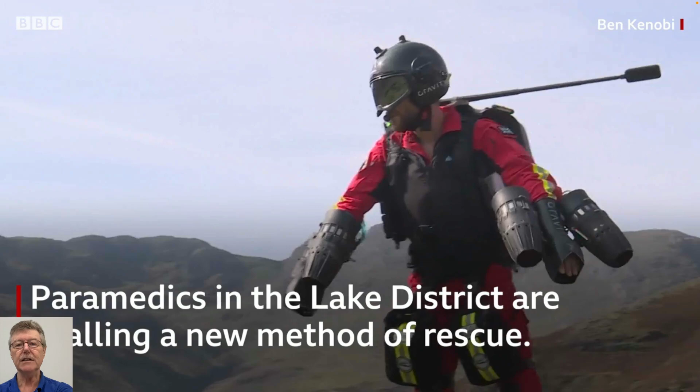I think there's another use which is more interesting and civilian, and just relies on the fact that... for mountain rescue, right? Exactly the same deal, same backpack, hovering, I don't know, 10 feet off the ground. Want to climb up a mountain to go and rescue a climber, with a drone in the background taking pictures. And you can just move up the slope very quickly. Same idea, just burning fuel, making sure your hands don't touch the things, using them individually.

...to nothing more than just the position of those to be able to steer and keep you off the ground. So just like the jet lev, we could do the calculating with that. The only thing that's different is that now the fluid coming out of them is no longer water at 1,000 kilograms a cubic meter - it's air, at about a thousandth of that, 1 kilogram. So you could do the scaling and realize you'd have to have a much larger velocity to get the required force on the ground to be able to lift a body of the same kind of weight as the jet lev. So kind of interesting applications for these.

All right, so that's kind of where we are. So that's the eye candy for today.

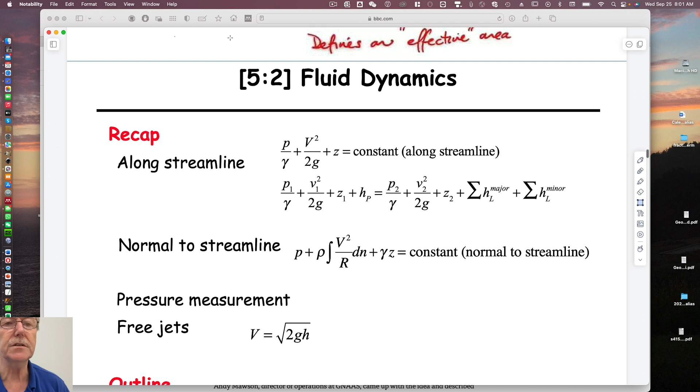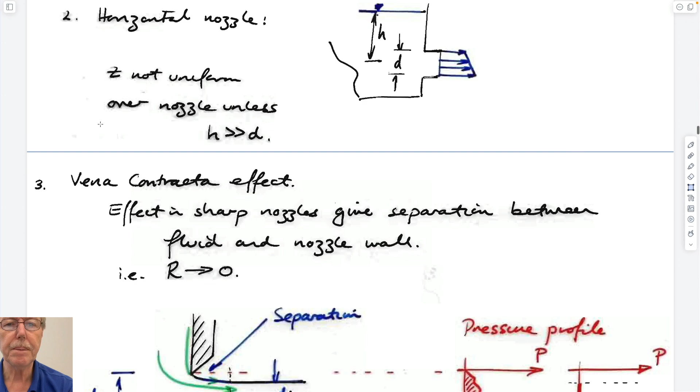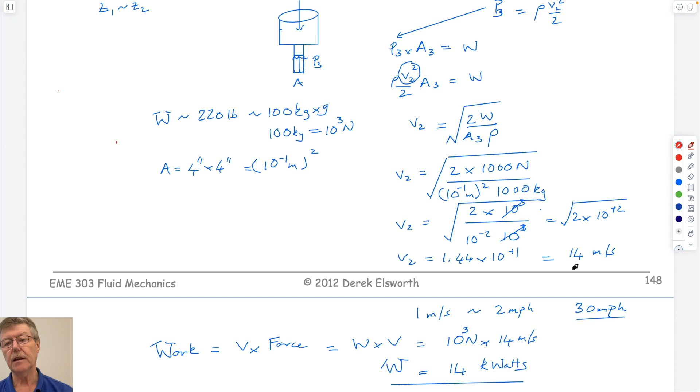Today I just want to continue with what we were talking about previously. I guess I should correct something from last time. We were talking about the jet lev, and we talked about the flow rate needed to lift this thing, which was something like a velocity of 14 meters a second. Then we multiplied this by the force, the weight it's holding up, which you could also calculate from pressure times area, multiplied by the velocity.

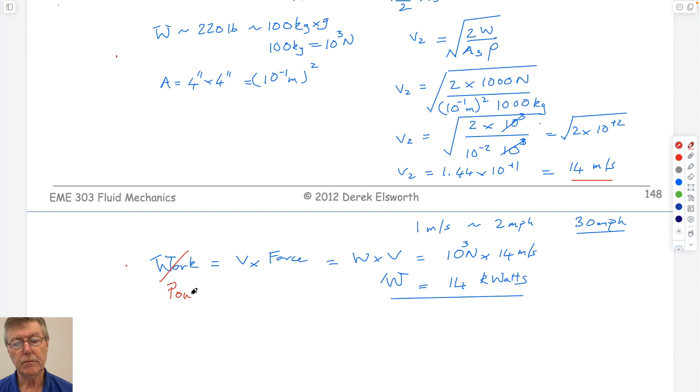So this isn't work, this is actually power, right? Don't need to be pedantic about it, but work is equal to energy, which is equal to force times displacement. So it's in units of Newton meters, which is a joule. And power is the rate of doing work, which is Newton meters per second, which is joules per second, which are watts.

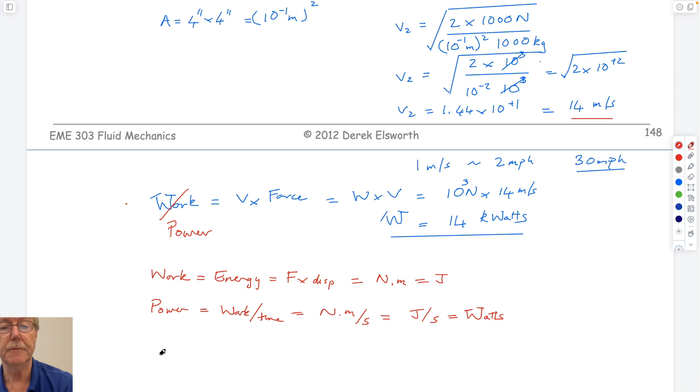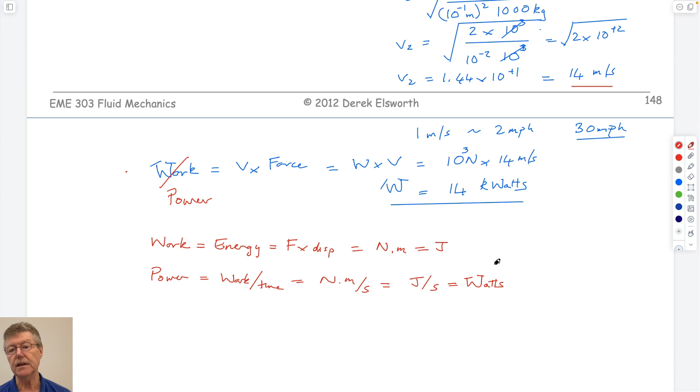Hence the use of W here. And so instead of a displacement, we're using a displacement rate of velocity, and that gives us the power you'd need to be able to run it. The other thing we didn't do last time was another example, which perhaps we'll do now.

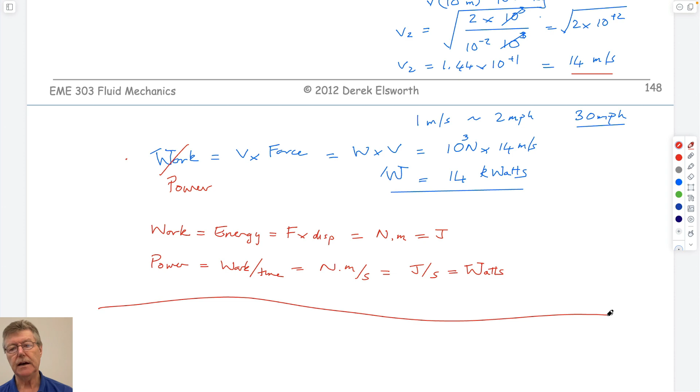Before we get started, let's go over what we might try to do today. I just want to do some examples, then that's all I want to do.

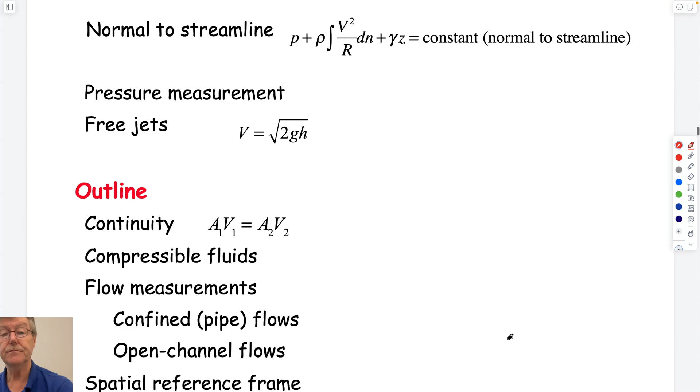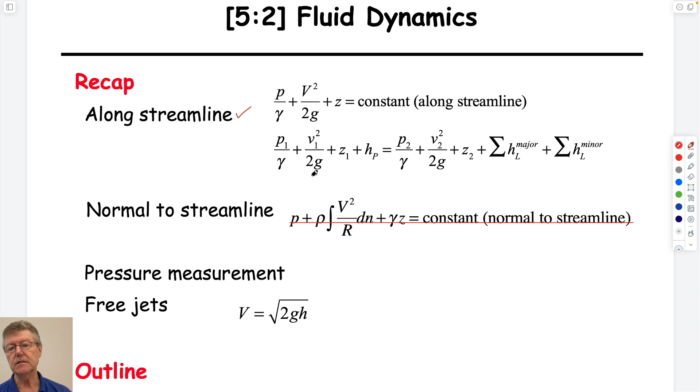We talked last time about flows normal to streamlines. Rarely do we have to use those. Much more commonly, we use flows along a streamline. This represents along streamline velocity, upstream and downstream. We can write it downstream and upstream, it doesn't matter. For now, these loss terms are zero. We don't care about them.

And we can write it, I always write it this way. This is just writing it between two places. It stems from the fact that from upstream to downstream on a streamline, the Bernoulli potential is always the same, comprising a pressure head, a velocity head, and an elevation head. This is also the energy put into the system by a pump, but don't care about that now.

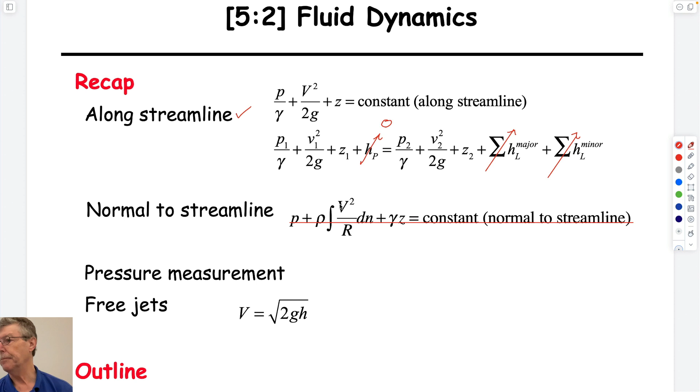So we've used Bernoulli a couple of times. I made the point of what it requires: inviscid - I don't think I got them all last time - irrotational, incompressible. I think I said isothermal, that is the case but that's not the main one. The other one was steady state.

So inviscid means that essentially viscosity is zero. There are no viscous losses. So air comes past me, or water flows in a pipe, there's no drag on the pipe slowing the water down. So inviscid is a requirement.

Irrotational means you don't get eddies forming as you flow past a structure. So maybe if you flow past a structure, air comes here and goes around it - you don't get things doing this as it goes past. Incompressible means it should be a fluid, a liquid, but we'll apply it to compressible fluids like gases as well. And steady state means it always looks the same.

Yes? What causes the eddies to form? Not Coriolis - a small perturbation allows it to get out of whack. Maybe there's some roughness that makes it go out from the skin, and that develops that. But I guess they're for larger scale as well - just a flow field, interacting flow fields.

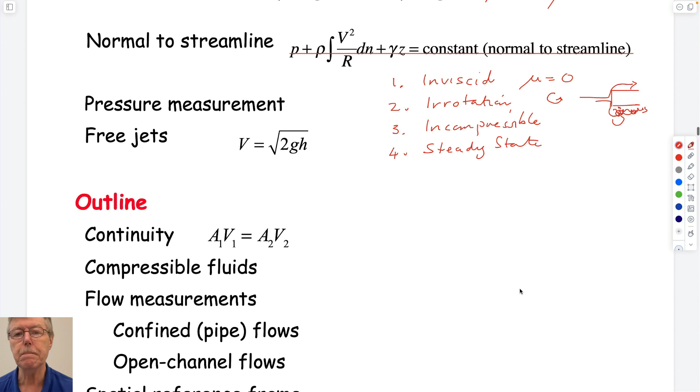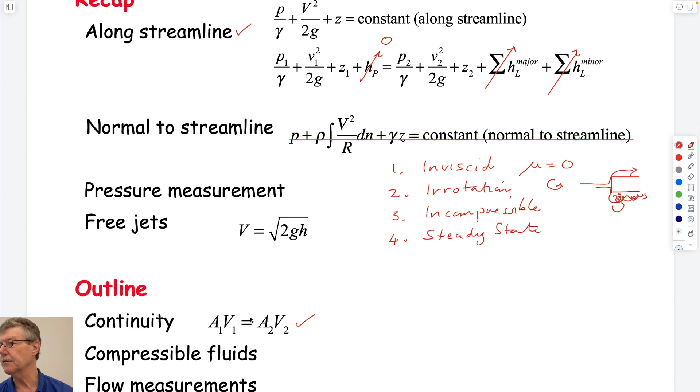Okay, so we'll maybe have a look at some of these. We talked about continuity - volume in equals volume out, or mass rate in equals mass rate out - which, if we have Bernoulli's equation with 6 terms and 2 unknowns, we can link the velocities and then only have 1 unknown and 1 equation, then we can solve that. So we can do some examples, let's just try messing around with some ideas.

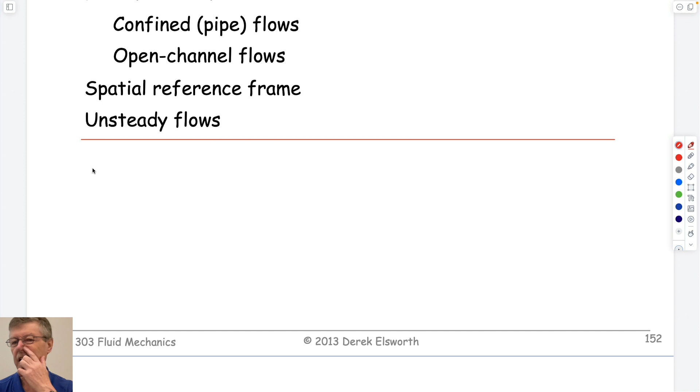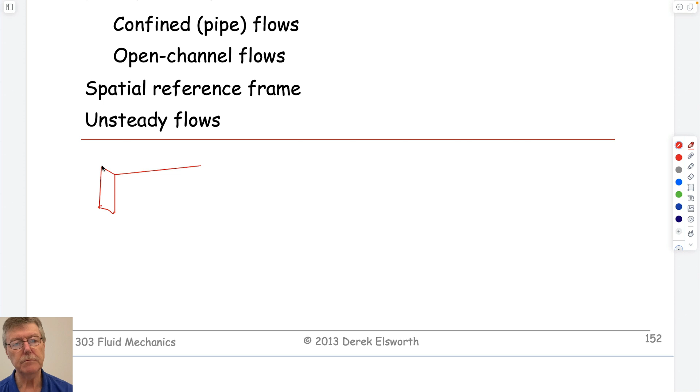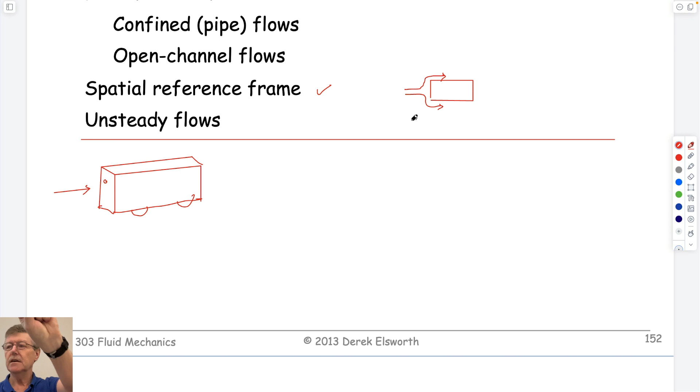Wheel here, a wheel here, and his little face here. And so relative to that, we have a velocity, and it has to be steady state. We kind of alluded to it for the pitot tube, right? We know that if you're looking at a bicycle go past you, initially it's here, then it's here, then it's here, if you're taking a picture. So the air in front of you at this particular spot initially has 0 velocity. The bike comes along, it has to get around the bike by doing this, just as we previously drew. So the air has to be moving some, and then the bike is over here and the air is static again. So clearly, if we took those 3 shots, the point of air that we have here is not steady state because it's changing its velocity with time. It's 0, then it's 10 miles an hour, then it's 0. And so what we have to do is choose a frame of reference that we attach ourselves to the bike.

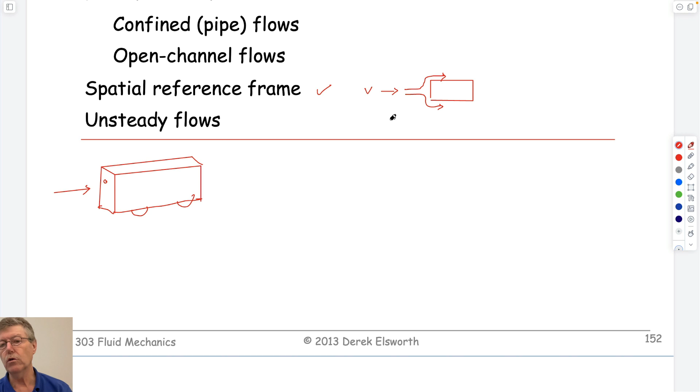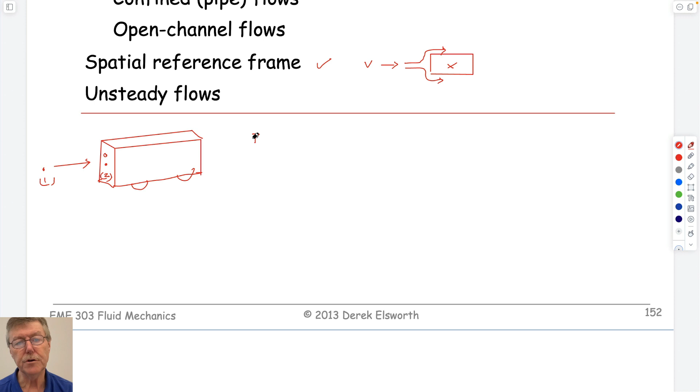So we're traveling with the bike, and instead of the bike moving, we're looking at a static bike, and the velocity of the air in front of us is moving towards us, and we're static, like a bike in a wind tunnel. If we want to do this, we could do the same as we did before. We can write the pressures at locations 1 and 2. We can write Bernoulli at 1 and 2, and then choose what we know for each of those.

Plus V2 squared over 2G. We know that upstream air pressure, atmospheric, elevation Z1 and Z2, they're not 0, but let's make them the same, so we get rid of them if they're physically the right elevation. This is Z, and this is Z.

Velocity here at point 1 is 0. We don't know what the... No, not velocity, that's wrong. I just disregarded my own tenet, right? It's coming towards us, it's not equal to 0. That's the whole point of this exercise, I guess, right? So velocity is unknown, the pressure is unknown, but the velocity here of this jet impinging, V1, V2 has to be 0 because it's turning a right angle, so it hits this, this has to be 0.

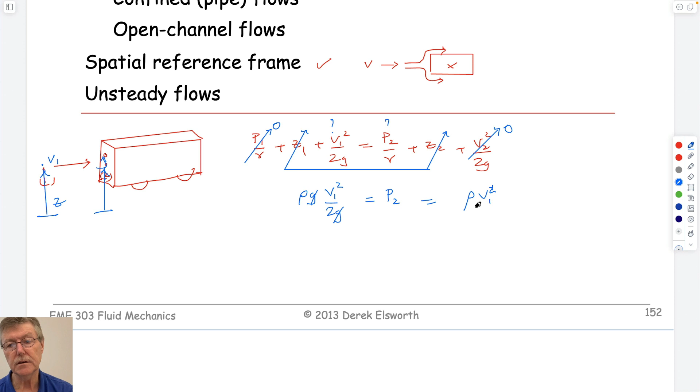So if we rearrange that, in terms of pressure, we end up with pressure 2 equals V1 squared over 2g times rho g, which is equal to rho V1 squared over 2. And so if we know what the terms are for that, and if we know what this area is, let's say 1 meter squared, let's try that.

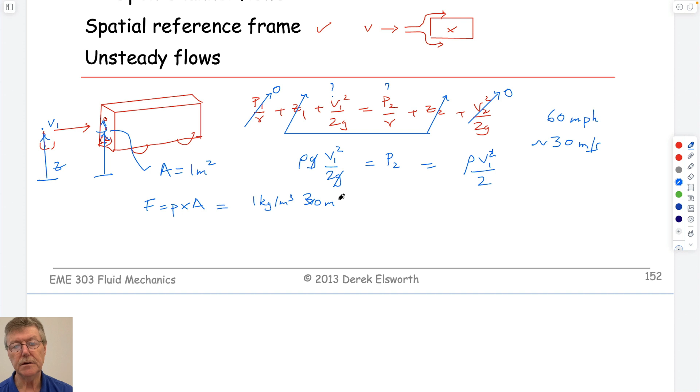Then what do we have? Force is going to equal pressure times area. Pressure is equal to density of air times V1 squared. What's V1? It was 60 miles an hour, which I happen to know is 30 meters a second. So this is 30 meters a second squared.

Divided by 2, which is P, times 1 meter squared. So how good am I? 3 times 3 is 9, which is essentially 10 plus 2 zeros, which is 1,000, is that right? 1 times 3, 3 times 3 is 9, 10, 2 zeros, 1,000.

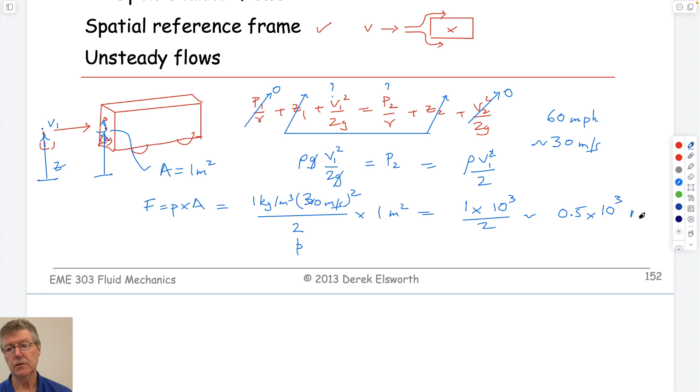Am I missing something? Density, velocity squared, density, velocity squared over 2 times 1. So 1 times 10 to the 3, this is half times newtons. And so that's the force that's applied.

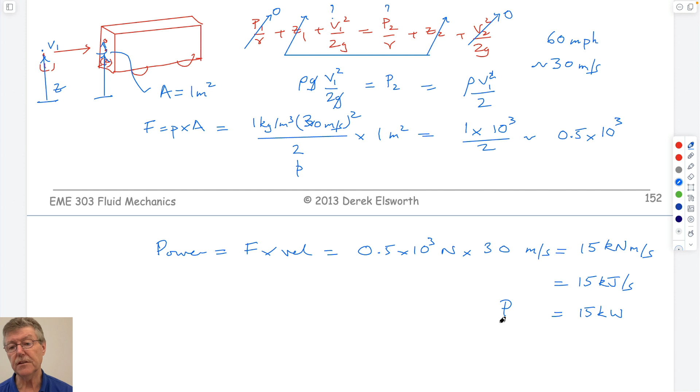And so if we want to know the work, power, I guess, right? That's right. Equals force times velocity, equals 0.5 times 10 to the 3 newtons times 30 meters a second, is equal to 15, that's right, kilonewton meters per second equals 15 kilojoules per second, which is 15 kilowatts. So the power you need to cycle at that speed is apparently 15 kilowatts.

Well, one of the things that I had on here, the output of a person, anyone know what the output of a person at max, was it VO2, is? Hazard a guess? About half a kilowatt. So I know this probably, if we look at the thing that we had, this is it.

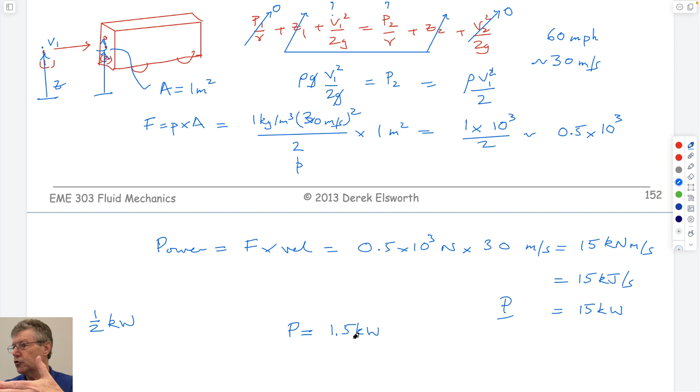I can't imagine the front of this, which is here, is a meter in cross section. So maybe it's a tenth of that, right? If it's this, since it's tapered, that would take it down to the power being 1.5 kilowatts. That's probably closer to reality. If we think max for a person is half a kilowatt, then this is pretty close. It's probably because it's tapered, it's actually not a straight, flat face, and so it's probably in the ballpark. So it probably can't be 1.5 kilowatts unless he's a super athlete, but it's something of that order, and that's how you can get that number. Okay?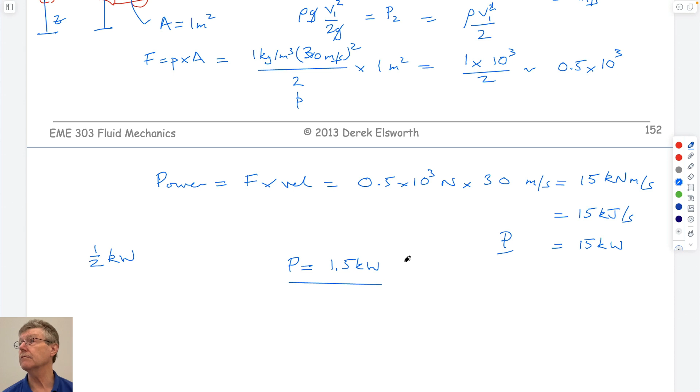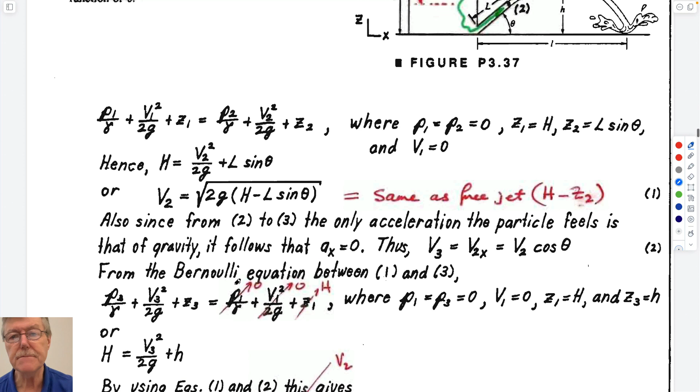So, spatial reference frame matters. It has to be steady state. What other examples do we have? Yeah, okay. Well, let's do Jesse Sharp as well, because that's instructive. So you have Niagara Falls.

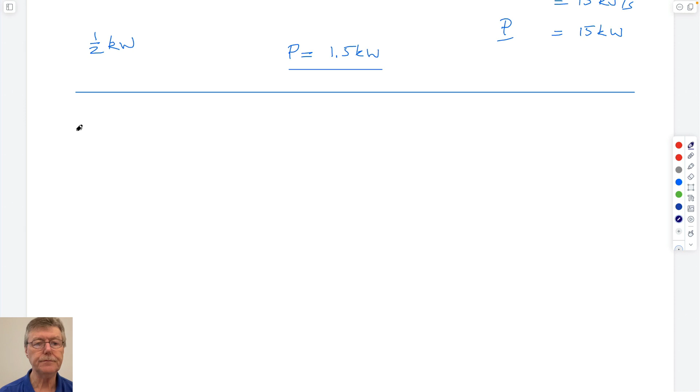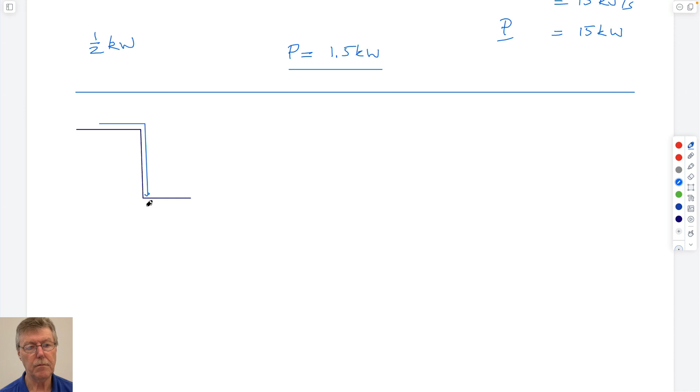And you have Jesse Sharp wanted to come across Niagara Falls. So you have points 1, 2, 3, and 4 if you wanted to, right? Niagara Falls is about 120 feet, I think.

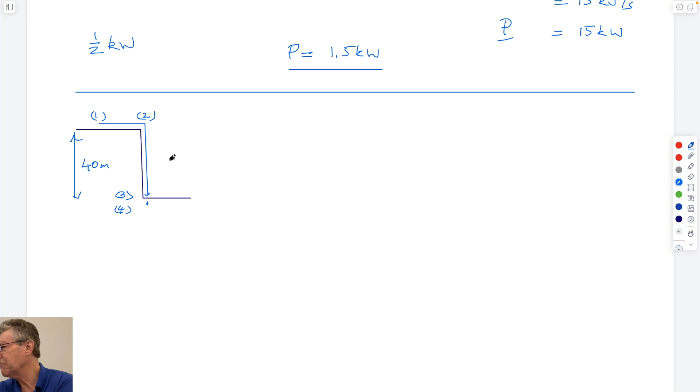So what do we want to do? We want to calculate what the two things I guess we want to calculate. We heard that it took 3 seconds to get down, so we could try and verify that. And we don't know what the impact velocity was at the depth, but we could calculate the velocity.

The velocities we calculate using Bernoulli are always streamline velocities. It doesn't care that we're going around a right angle. It's always a streamline speed, if you like, and so it's always in the direction of the streamline. And so if you wanted to calculate velocity, then we would calculate

elevation 1 plus P1 over unit weight plus V1 squared over 2G equals Z3 plus P3 over unit weight plus V3 squared over 2G. This isn't 2G, is it?

Unit weight. And so what do we know? So if we take our datum here as z equals 0, then Z1 we know. Atmospheric pressure as gauge pressure - atmospheric pressure before it hits the bottom is gauge pressure. Z3 is 0, just from our datum.

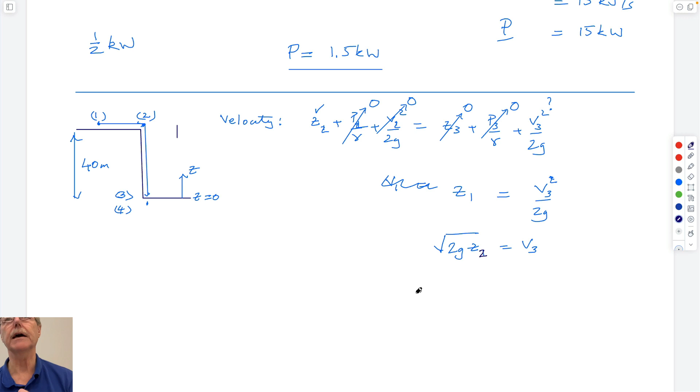It's exactly the same as if we had a container. If I can draw a container, with a free jet coming out of it.

This is H, this is V7, just so we know. Now VZ, V7 - the equation for a free jet was that the velocity is equal to the square root of 2gh. And so all this is exactly the same as this. It starts off at 0 velocity here. This is the same height. It doesn't care that it's doing this.

You could also, if you had a ramp - I think I'm going to confuse this diagram - if you had a ramp that instead looked like this, so that the water is flowing down this ramp at some velocity here, so you had V5. What's V5? This, I guess, is V7.

V5 is going to be what? It's going to be exactly the same as this expression here. So V5, if we looked at it, would be equal to the square root of 2g z2.

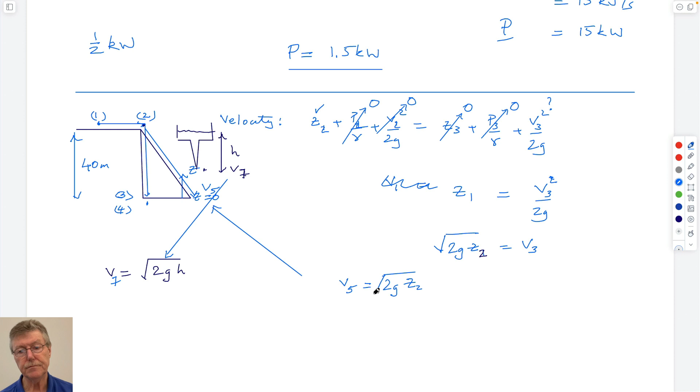But importantly, the velocity V5 is oriented in this direction, it's in the streamline. So the one thing you do have to remember for this is always that the velocities that you're talking about are along a streamline.

For a free jet, it's vertically downwards. Falling off Niagara Falls, it's vertically downwards. If it happens to be a ramp, a stream flowing down a steep incline, it's along the direction of that incline, and of course it would have components in the vertical direction and the horizontal direction. Each of those would be different - they'd be the maximum value here along the streamline that you have to worry about. And so that's useful to know.

And so we get exactly the same expression as we do for a free jet, and we do even if it's inclined. It only cares about the height of this drop.

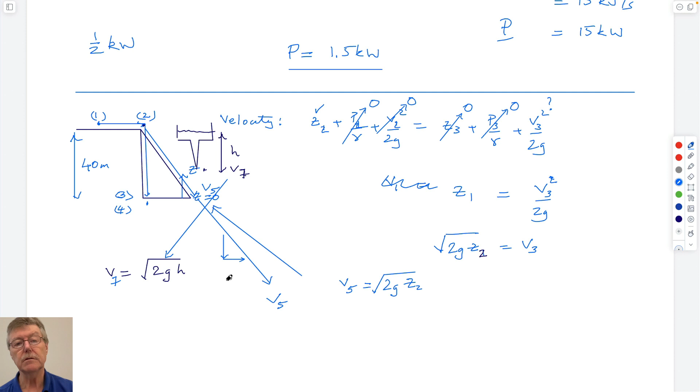And I guess the other thing that you could do if you wanted to prove to yourself is if you want to look at what this acceleration is - if you write the acceleration in the z direction, we know that acceleration is rate of change of velocity with time. And we know that's the same as rate of change of velocity with time multiplied by 1, right?

And if we looked at the change in z with time, this by definition is a velocity. And we look at this, then we could take the derivative of dz of vz times vz. That's just what this expression is. And of course, we have

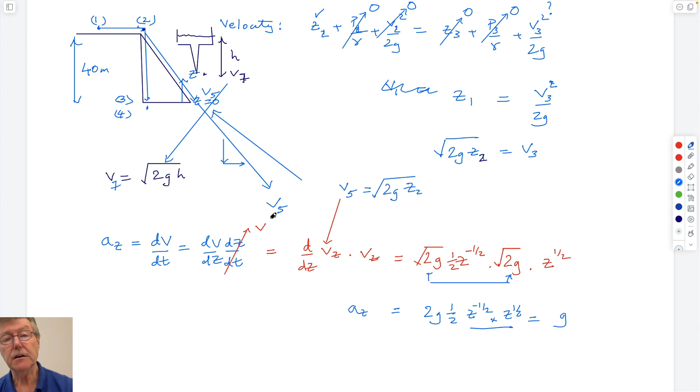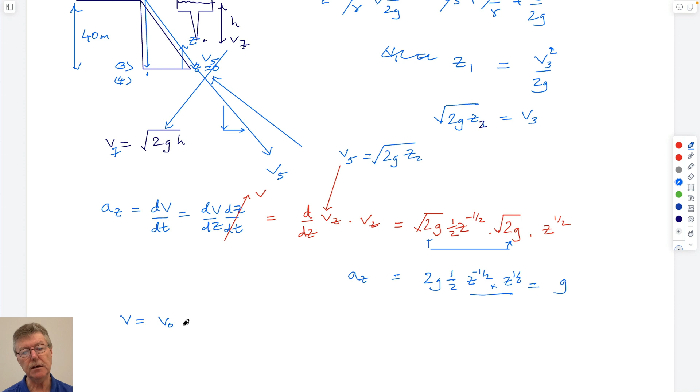Well, I guess actually the other thing that we might be interested to do is how long does it take to come down? Well, we know how to do that. So you've done that in your past before. Velocity is equal to initial velocity plus acceleration times time, right, from dynamics.

So velocity is just equal to change in elevation or change in location with time. And so you could rewrite that as dz is equal to v0 dt plus at dt. And you've seen this before, right, obviously?

Right. So if you want to know how long it takes to come down, you could just solve this equation. You know that as it's coming over the lip and going down 40 meters, the velocity here is 0. You know that you have to get down 40 meters. So you know this is 40 meters.

And you can, well, because it starts here, the constant drops out, and so it's just 40 is equal to times 2 divided by acceleration, which is gravity, equals t squared.

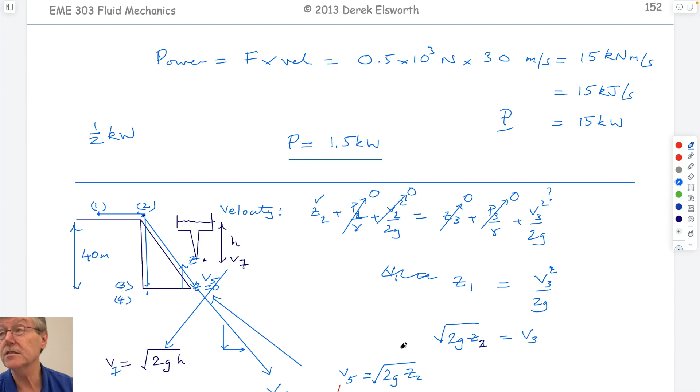So, other questions. So here's another esoteric example. So you have a bucket that has a jet coming out of the bottom of it. You have that jet directed at some angle. How high does it go up, and how far does it go if you're doing that?

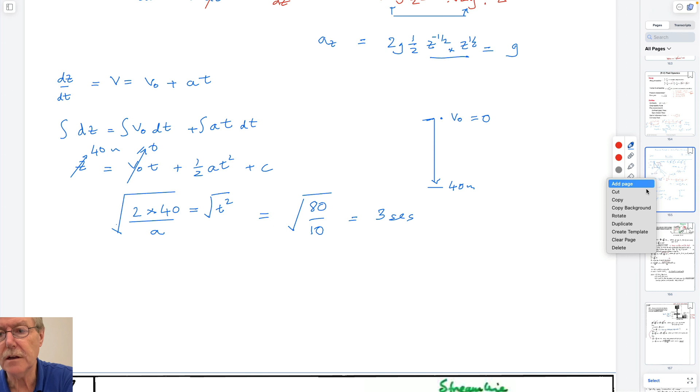How do you get that from Bernoulli? We could go through the example. I don't want to. I don't know if you like me writing these things out, but I think it's better to do that. Okay.

Let's do the example. All right. So here's the idea. Let's go through it slowly. We have a bucket that has a jet coming out of the bottom of it. That bucket has a water level in it. And that height is, we'll call uppercase H.

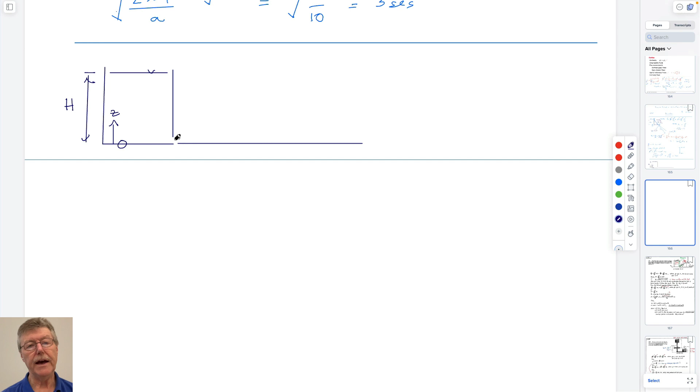We have the horizontal. We're going to take this as our Z. Z equals 0 is here. We angle this jet up from the bottom at some angle theta. And we want to know two things potentially. What's this height? And what's this length?

I'll do uppercase L. So the easiest way we could do this would be to direct the jet vertically upwards, right? So if we had the tube so that instead of being horizontal, it was going vertically upwards, then how high would the jet get?

So we can write point number 1, point number 2, point number 3. So if we want to calculate if it's directed vertically upwards, we could write Bernoulli between those 2 points.

P1, Z1 plus P1 over gamma plus V1 squared over 2G equals Z3 plus P3 over unit weight plus V3 squared over 2G.

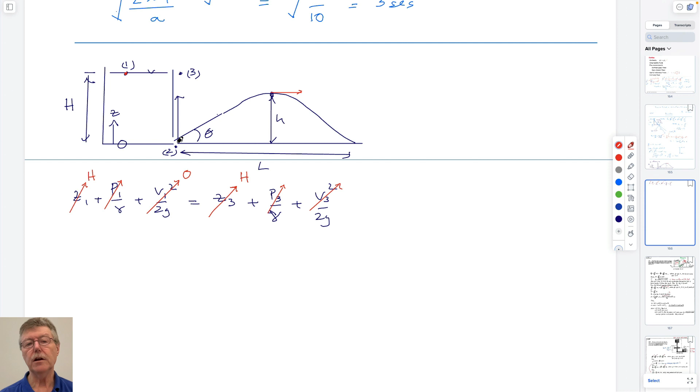So if you have it going up here, it starts off at some big velocity. It's acting against gravity as it goes up, slowly slowing at this apex where it's 0. Once it's here, a drop of water will fall back down, and when it falls back down, it'll be going exactly the same velocity in the opposite direction as it was when it was up here. As you can imagine, it's symmetrical. So that's one way to get that. And of course, if you just had a pipe attached to the side here, the pipe would rise up to this elevation, just as a standpipe on the side of a cistern, in a toilet for that matter.

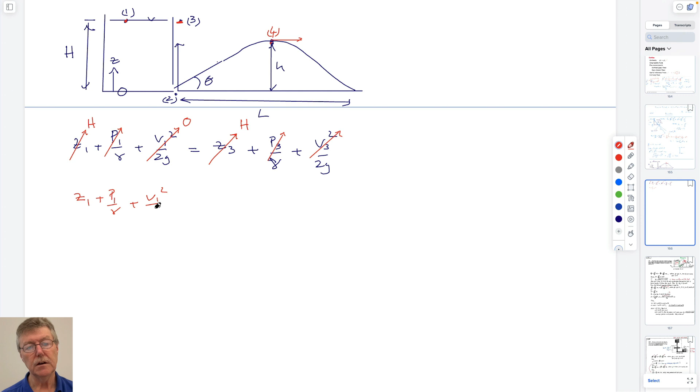So how do we get the magnitude of H? What we could do is define another point, 4. And we could ask, what's the velocity at point 2? So if we want to get the velocity at point 2, we can write this as Z1 plus P1 over gamma plus V1 squared over 2G. It won't change from before. And it's equal to Z2 plus P2 over gamma plus V2 squared over 2G. So this is the streamline velocity, this is the velocity V2.

This is still going to be H. This is still going to be 0. This is still going to be 0. This is going to be 0 from the place of our datum. And because it's come out into the fresh air, pressure acting on all sides has to be the same, so this also has to be 0. So it ends up being the equation of a free jet, which is just that V2 is equal to the square root of 2G uppercase H. You only have this term and this term, and this is what it's going to be.

And so, in other words, you could also write this in terms of the original expression here, which will be useful for us later, which is that H is equal to V2 squared over 2G, right? This term and this term are the only two live equations.

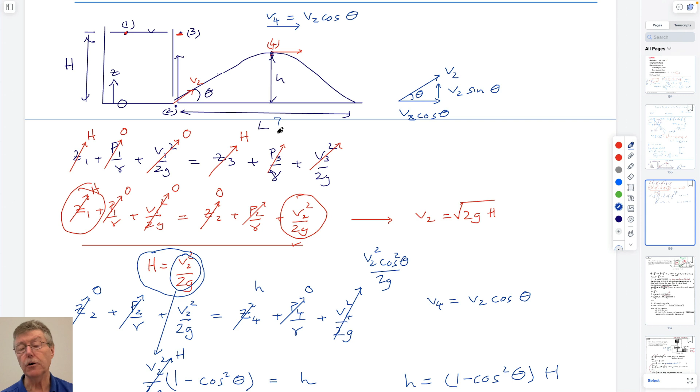So that's one part of the question that we might want to ask: how high does it go? I guess we could also ask, how far does it go? And for that we'd need to know something about its height. And we kind of know that, right? If we know what the height is...

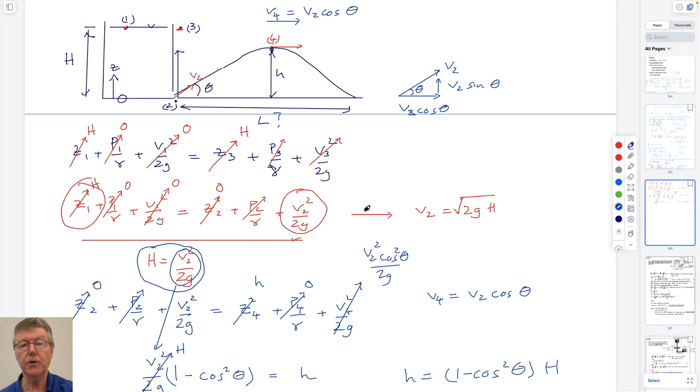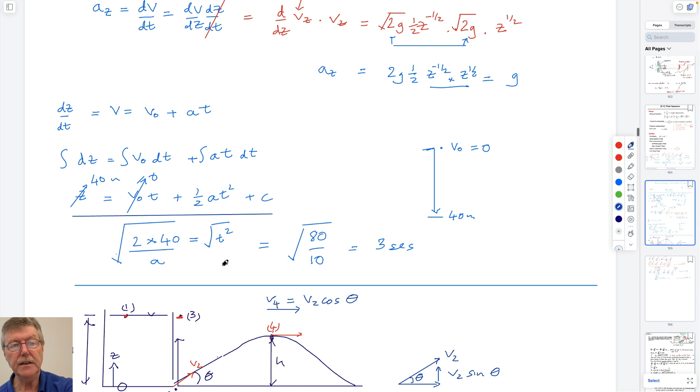And we know that this equation here, probably the easiest thing to do is write it out. We know that z is equal to v0 times t plus a half a t squared. So if you think about being at the apex of this climb, the vertical velocity v0 is 0, right? Top of this climb, it stops, stalls out, comes down. And so the vertical velocity by definition has to be 0. And so this is 0.

This is gravity. Z is the distance it's going to fall, which we've said is h. And so h is equal to 0 plus a half g t squared. Or the time it takes to fall is going to be equal to the square root of 2 times h over gravity.

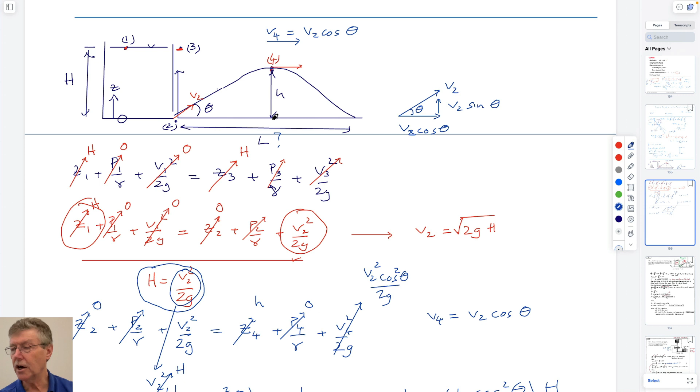Not Z, we call it uppercase L. L is equal to the time it takes to fall down, which is the distance traveled being the time it takes to get up there plus the time it takes to get down. So it'll be 2 times the time it takes to fall. And so the distance traveled, L, will be equal to the velocity times time, which will be equal to V4 times 2 times T4, if you like.

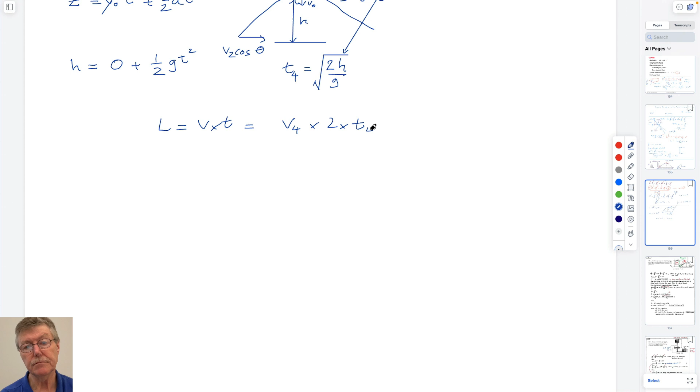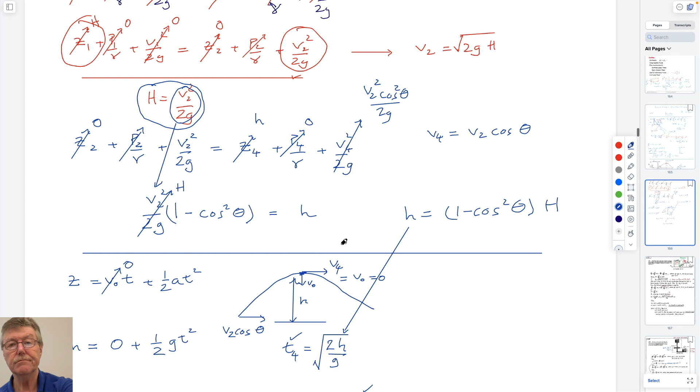And so if we know what this time is, then we know this. If we know what V4 is, and V4 is just equal to V2 cosine theta, and V2 was just equal to the square root of 2gh.

We can get the velocity as it comes out of here. We know it's a streamline velocity along the trajectory that it's directed. If it's directed upwards, it will climb to its apex. The apex will be the height of the water in the tank, and it'll go no further. If it's angled, it will go off to the side. If it's angled, we know this velocity along the streamline. If we know the velocity along the streamline, we can also get the horizontal velocity, and we can also get the vertical velocity.

If we know the streamline velocity here, we can write Bernoulli between these two points. And since we know that this streamline velocity is linked to this along-the-streamline velocity here through Bernoulli, we can solve Bernoulli to get the fact that the height we solve for is equal to the ratio of these two components of velocities in the horizontal direction, which is given by this.

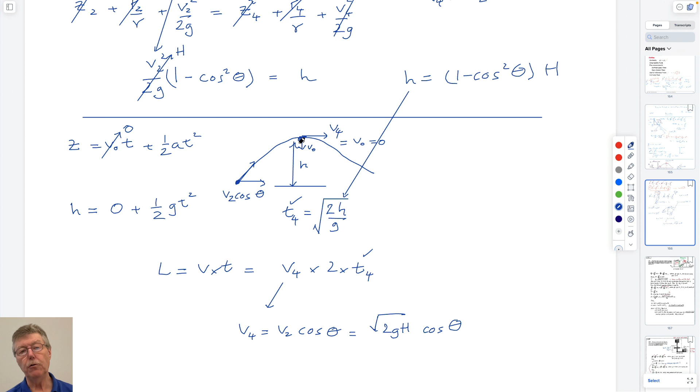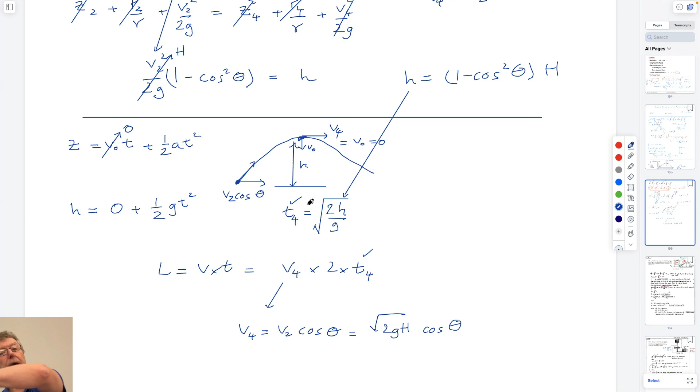Once we know the height, we could calculate the time by thinking of us sitting at the top of this jet and dropping water down to the floor. That's the time it takes for it to fall. If we multiply that time by its horizontal velocity, that's the distance it will go horizontally between its apex and the side. And since it's symmetric, a parabola going across from one to the other, the length it would travel is the time taken to fall plus the time taken to climb, so 2 times that is the total distance.

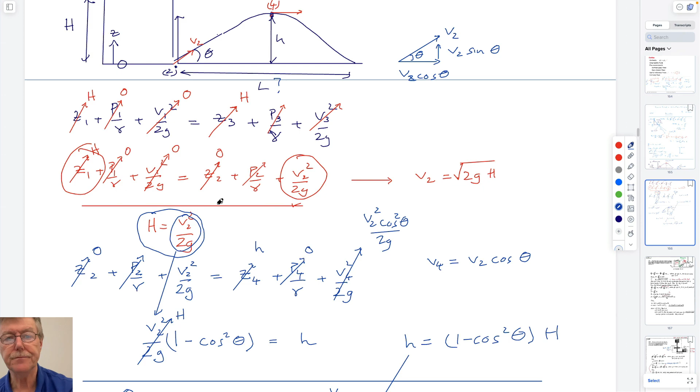We know the water is traveling horizontally at a velocity we know, and so we can calculate all the coordinates. So it's a bit complicated, but it's just a matter of being able to write these out for streamlines. And believe it or not, it's much simpler what we've done there than what we would do otherwise.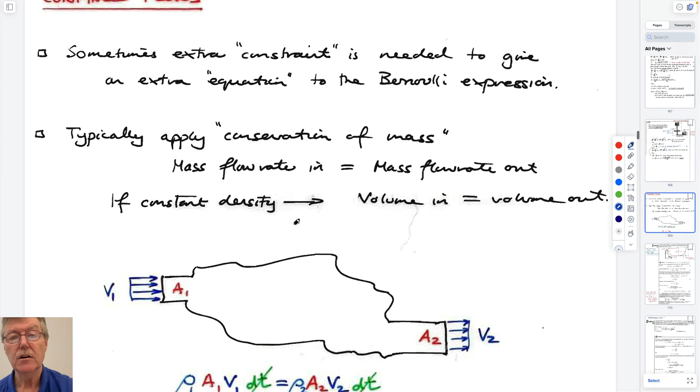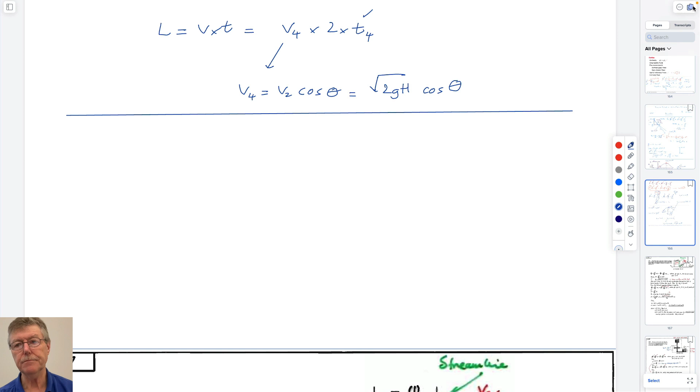We've, let's close up with one quick example. I know you're maybe drinking out of a fire hose with the rate we're doing this morning. One other free jet example.

We made the point before when we talked about a free jet that the velocity at point 2 we could write as V2 equals the square root of 2g times uppercase H. This is on a streamline. If the jet was directed downwards, that would be the same velocity coming out here as it would be going horizontally. And if it was directed upwards, also it would be the same velocity. If it was going upwards, it would climb against gravity, reach an apex, stop, and then fall down.

If it's going horizontally, if this was sitting on a table, it would be like the Belgian fountain, the guy peeing in the Belgian fountain.

We've always assumed that this cross-sectional area A1, where we get this magnitude, is always big so that we can throw away this velocity. But if this is not big, and the area that it's flowing here is area A2, if we write Bernoulli, we'd end up with Z1 plus P1 plus V1 squared over 2G equals Z2 plus P2 plus V2 squared over 2G.

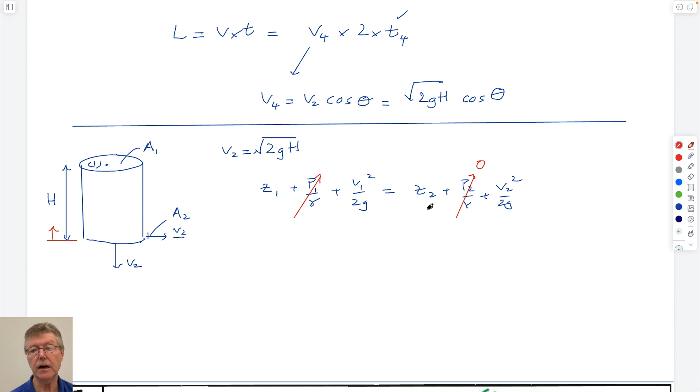And if we do our usual things to limit our variables, we know that pressure up here is 0. We know that pressure where the jet comes out is also 0. And if we take our datum here as 0, then we get this is equal to 0.

Is that the bathroom? I think it is, actually.

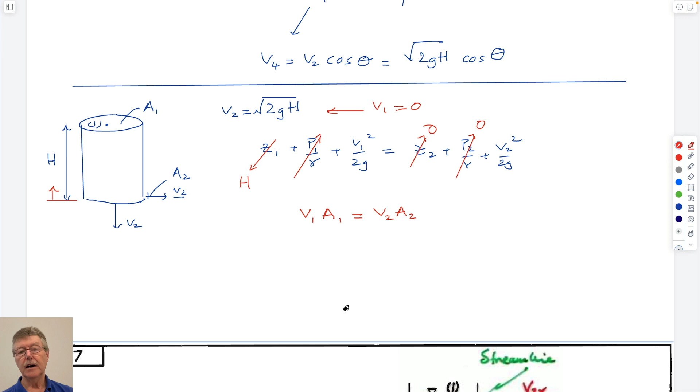And so usually, for the big tank approximation, we assume that V1 is equal to 0, and we can get away with that. Big tank, small pipe. If that's not the case, then we might have to write that the velocity at the top of the tank times A1 is equal to velocity 2 times A2. The reason we have to do that is because with Bernoulli we have one equation, but we have two unknowns. We don't know velocity 1, and we don't know velocity 2. So what we need to do is write velocity 1 as a function of velocity 2.

And we need to substitute that in here. And if we do that now, our equation is written only in terms of V2.

So, for instance, this example that I'll wind down to is saying if we keep on flowing water in here at some volumetric flow rate Q, so the level always stays at the top of the tank, always stays at level H, what is this flow rate?

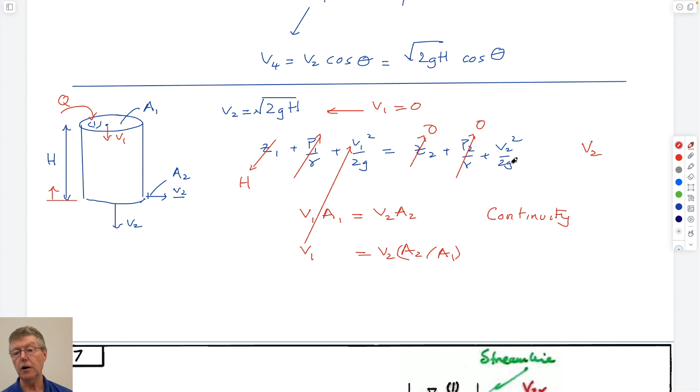Well, clearly, we're assuming that this has some kind of small velocity V1, because we're pouring stuff into the top, so it has to make room for that new fluid to come in, so it has to have a finite velocity. And so if there's a velocity here and a velocity here, we have one equation with two unknowns. We have to get rid of one of the unknowns. This is our continuity requirement, conservation of mass, actually conservation of volume. And if we substitute for velocity 1 as a function of velocity 2, then we only have one unknown. We can solve for V2, and therefore solve for flow out of the system.

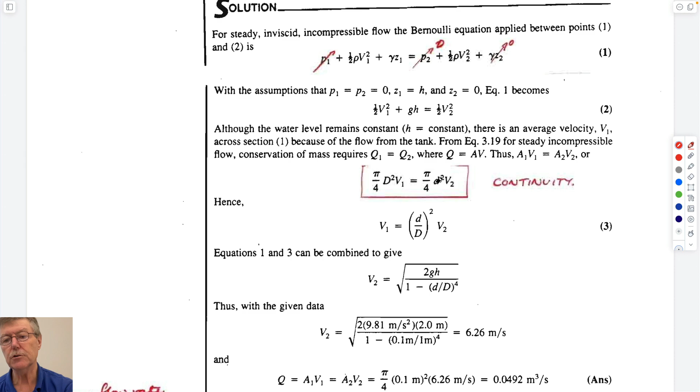And there's a very long example that does exactly that, which is there. We made it easier because we're talking in terms of areas instead of diameters of the thing. You have to use pi d squared over 4, but you get the same result. We didn't do that. We can do that next time.